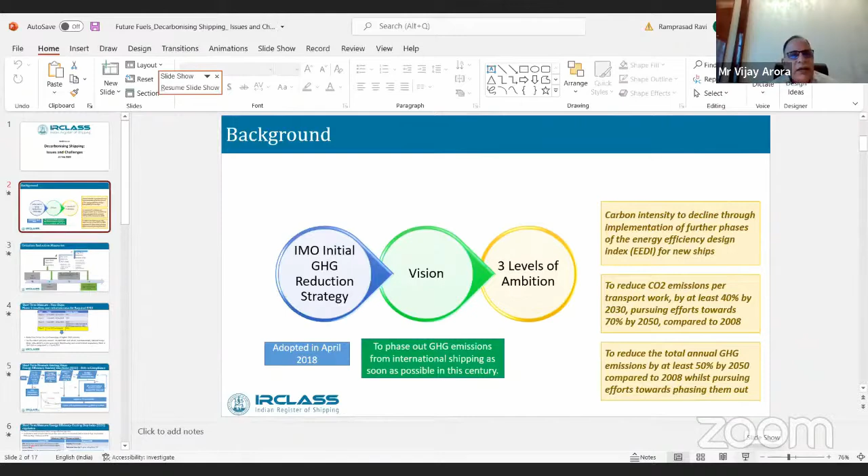So anything starts with a strategy, and if you look, IMO has been working on how the various emissions in the atmosphere have been controlled over a period of time. NOx emissions came, tier 1, tier 2 requirements came, then it came to desulfurization, and later on it came out with the IMO strategy on decarbonization, saying how we can further improve the GHG emissions. So this IMO strategy was adopted in April of 2018.

The vision was to phase out GHG emissions from international shipping as soon as possible in this century. And to achieve this, a combination of factors was taken into account: carbon intensity should improve by improving the EEDI, we should reduce the CO2 emissions by 40% by 2030 and 70% by 2050, and reduce the GHG emissions by 2050, all compared to 2008 levels. So the framework was put in place.

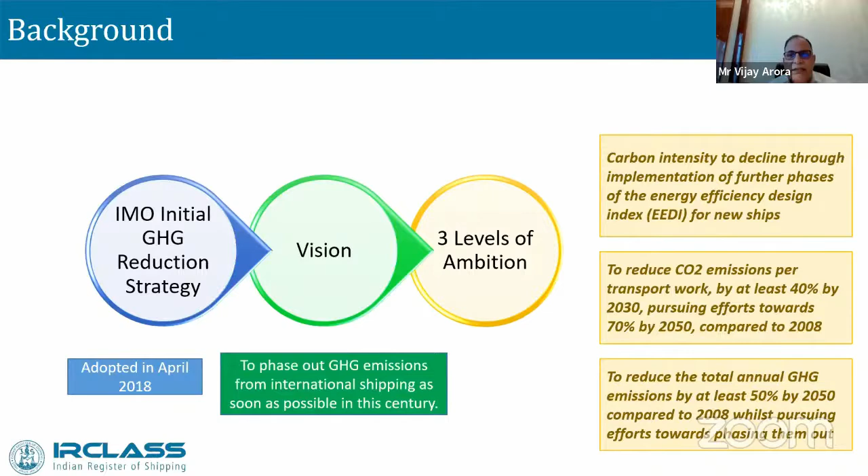So to achieve the vision, there were short-term, mid-term, and long-term measures adopted. Short-term measures were from 2018 to 2023, 2023 to 2030 are mid-term, and 2030 onwards will be long-term measures. We are currently in the short-term measures, and if you recall, in 2018, we came out with SEEMP Part 2, which talked about how the fuel consumption should be collected, and in 2019 we started collecting the fuel consumption.

And then in 2020, we talked about how, for new ships, the EEDI phase can be advanced, and that is how the new ships are helping us to see that the CO2 emissions can be reduced. At the same time, in 2023 EEXI and SEEMP Part 3 are coming out, where we'll be using the IMO fuel consumption data which is available with us, and the carbon intensity indicator will be used to see how both existing ships and new ships combined together are able to help us achieve the 40% reduction of CO2 emissions by 2030.

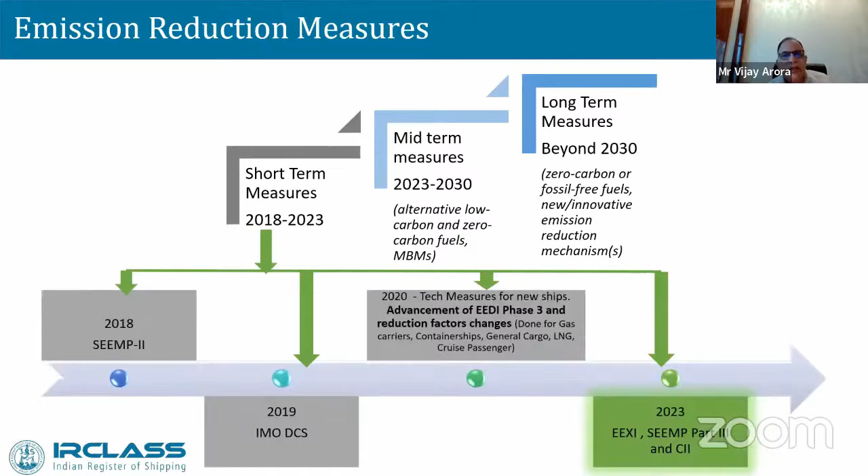So this is talking about the various phases of reductions which were applicable for EEDI, mostly for the new ships. The efforts have been on since 2013, in the direction of how we can reduce the CO2 emissions by designing ships in a manner that the fuel consumption is reduced.

And as stated in the IMO strategy in 2018, phase 3 has now been advanced, so that certain ship types of larger tonnage will be requested to start building ships in a manner that the CO2 emissions are reduced. And this advance of phase 3 will take place from April of 2022, where such ships, maybe gas carriers, container ships, will have further reduction factors of 30% applicable.

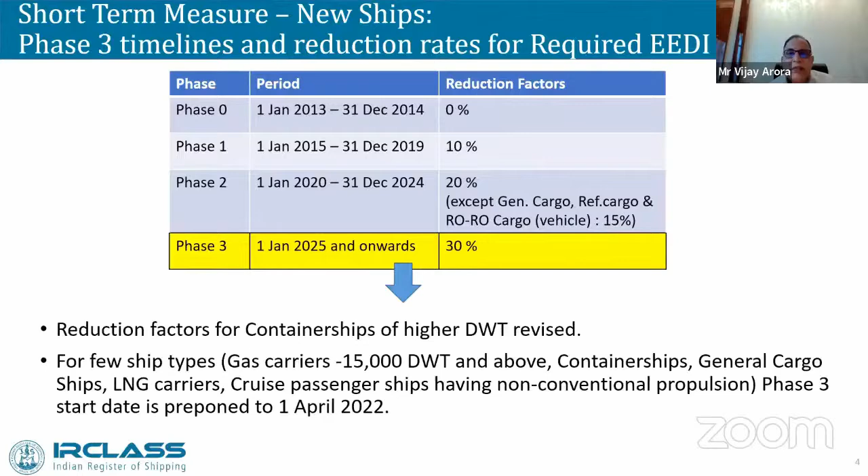As just stated, the combination of new ships and existing ships will continue for some time while we are using fossil fuels, and new ships are being designed with higher reduction factors. Even the existing ships need to catch up with the new ships.

And for that matter, IMO came out with the regulation which states that ships of 400 GT and above, and certain ship types mentioned in regulation 25, if their deadweight is greater than a certain threshold value, are subjected to this regulation, and that is how the attained EEXI will be calculated. The required EEXI will be calculated, and we'll be comparing that the attained EEXI is less than the required EEXI, so that the ships are issued the technical file and the International Energy Efficiency Certificate.

This will be mandatory from 1st January 2023, coming on any annual, intermediate or renewal survey falling due after this date. But the regulation will become effective from 1st November 2022. I would like to reinforce this issue: 1st November 2022, I think that date is a very important date.

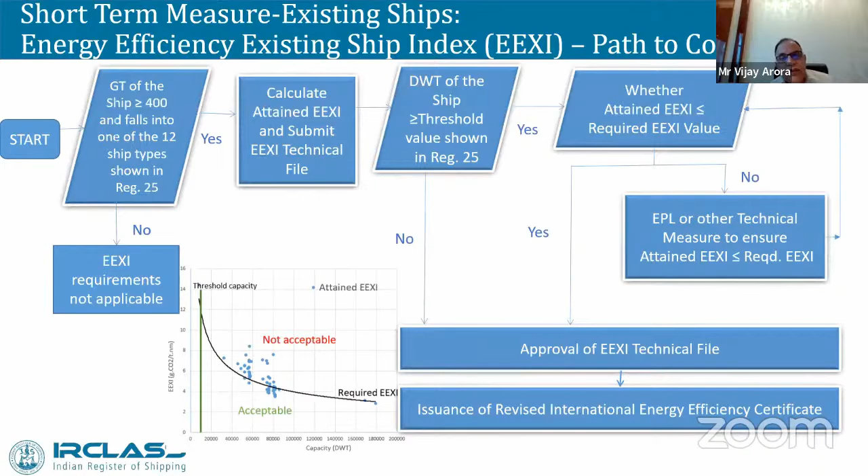By this date, the ship owner should ensure that this technical file, if it is possible, is placed on board. And if in case the PSC boards the vessel, you have a technical file available with you. And then the IEEC can be issued when the surveyor boards after the 1st January 2023 for whatever survey, first survey falling due. So we can go to the next slide.

I just remind you, your 5 minutes are almost up, sir. Okay, please continue. I may take 3-4 more minutes, sir, if you don't mind. Otherwise, I'll be faster, no problem. I'll be a little faster.

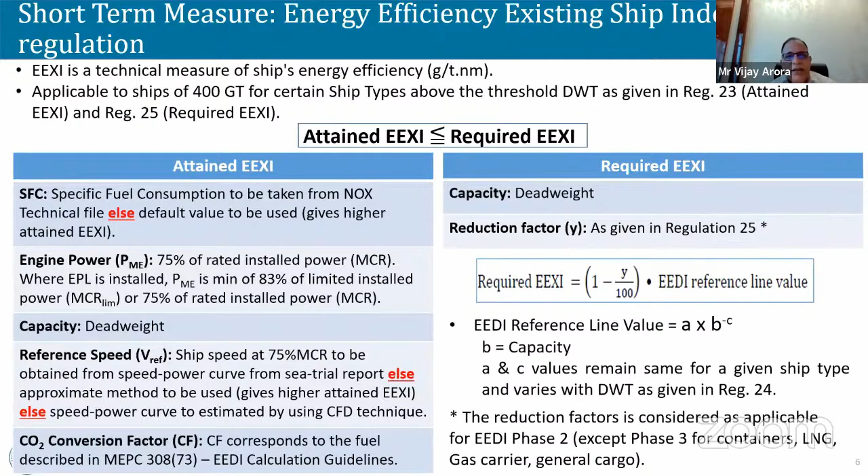So this is talking about attained and required EEXI, which I talked about. Here I have given information as to what documents and parameters are required for submission for calculation of attained and required EEXI. On the screen, specific fuel consumption is required, engine power is required, capacity and deadweight and reference speed is required, and conversion factor is required.

For calculation, the required EEXI has a formula which needs the reference line value and the reduction factors. Here, the important point is that the reduction factors for EEXI are compared to phase 2 of EEDI. That means existing ships have to match the EEDI of ships built with the phase 2 requirements, which is a very difficult task, but the owners have to do that. A little more difficult is that if ships are built before 2013 and don't have the sea trial report, then there are some issues.

But those issues can be resolved: either you can opt for the option that an approximate value can be used, or you can go for CFD analysis. The approximate value helps you, but it is not so encouraging for the ship owner because the attained EEXI goes on the higher side, by which the ship owner is affected. But if CFD techniques can be used to determine the V reference, which is not available, then the ship owner is at least not affected. We go to the next slide.

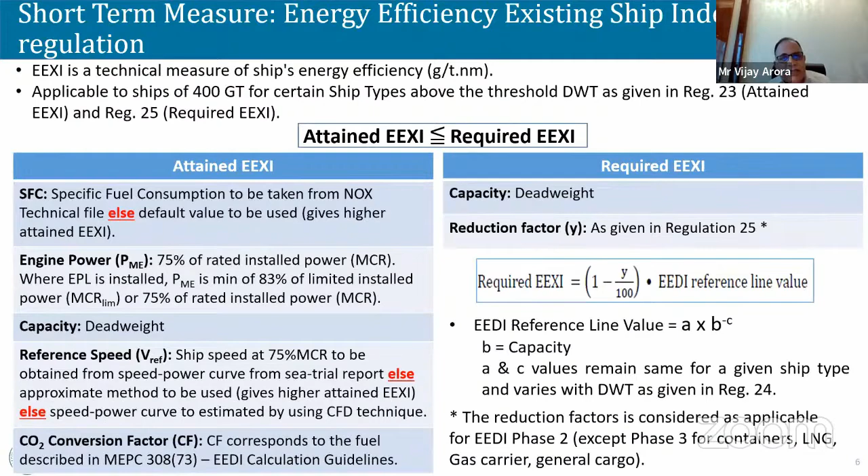Here again, I'd like to say something important: let us be very clear that if we are able to meet EEXI today, it is good, but you have to meet CII also for all the time you are going to operate these ships. So it is always better to improve your attained EEXI to a larger extent so that the design itself takes care of your operational efficiency, because the ships are old and cannot operate more efficiently than they do today.

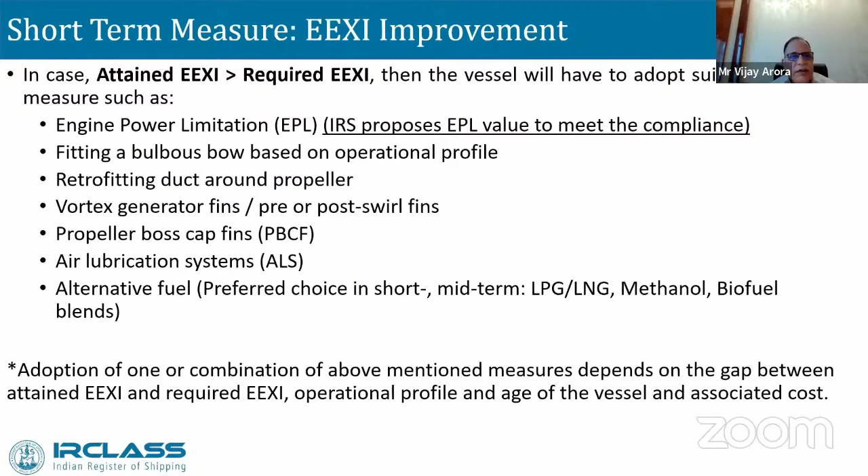You can control it to some extent, but if you can bring such energy saving devices fitted on your ships, you will be able to run these ships for a longer period, because this design efficiency will give you a factor in the CII part. We can go to the next slide.

So this is again for the use of the industry, the people who are going to sail on board, because when EPL is used, it is not that you cannot override it. You can override it in certain situations mentioned in the onboard manual. It could be adverse weather, a rescue operation or avoidance of pirates, and in those cases you need to record it in the onboard management manual, inform the administration and the RO that you did use it, and at the next port bring it back to normal.

And the records required to be maintained in the OMM manual are listed here, which can always be referred to in the onboard manual.

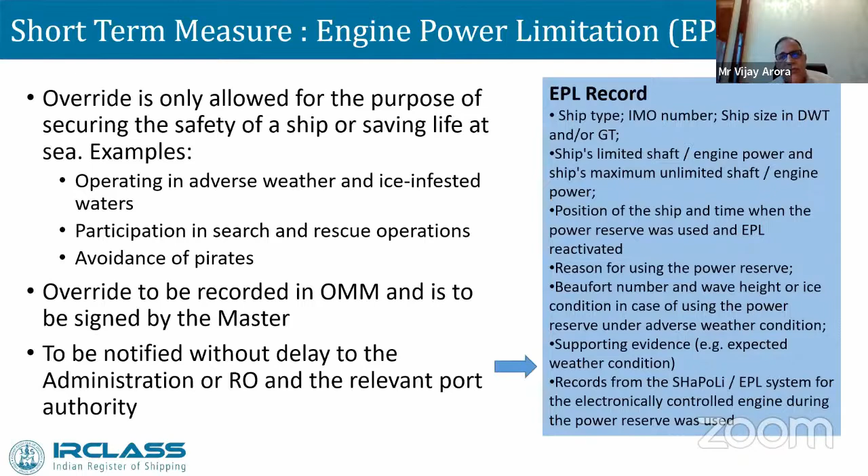So we can put the next slide.

This is the calculation we have done for the vessels where data is available with us. This example is only for tankers and bulk carriers. You can see the red dots are above the blue dots. The blue dots are the required EEXI for tankers and bulk carriers, and the red dots, being above, mean the attained EEXI is not meeting the requirement.

So most of the vessels today, almost 90% of the vessels which are at least with us, have a problem that they will not be able to meet this unless they adopt some measures. The range in which measures are required may range from 55 to 75%, which may lead to a reduction of speed from 15 to 5%.

So we can go to the next slide.

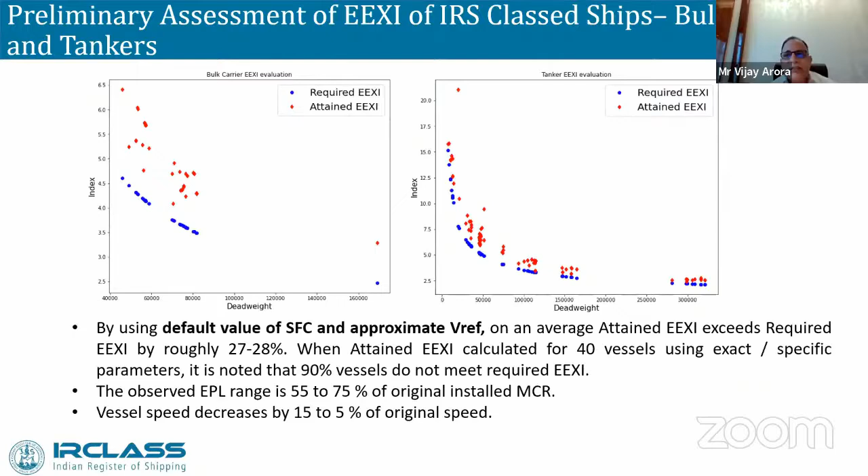This slide is an important slide. Here we are talking about the CII part and the new regulation, which is coming from the operational energy efficiency measure. In 2023, when this regulation comes into force, you already have to have a reduction of 5%, based on the 2019 fuel database, which people should have taken into account, but not many people must have. So there is something to be done on the operational efficiency measure so that you meet this. Otherwise...

It is quite possible, with the ratings given as A, B, C, D, E, that once you calculate, we have given an example for a certain ship where the required CII is, let's say, 10, and the attained CII comes to 9. She falls into B category. But then, as the period lapses, the same ship, because of no further improvement, may go to C, D, and E, and that becomes a discouraging factor for the ship owner.

This can be explained in the next slides.

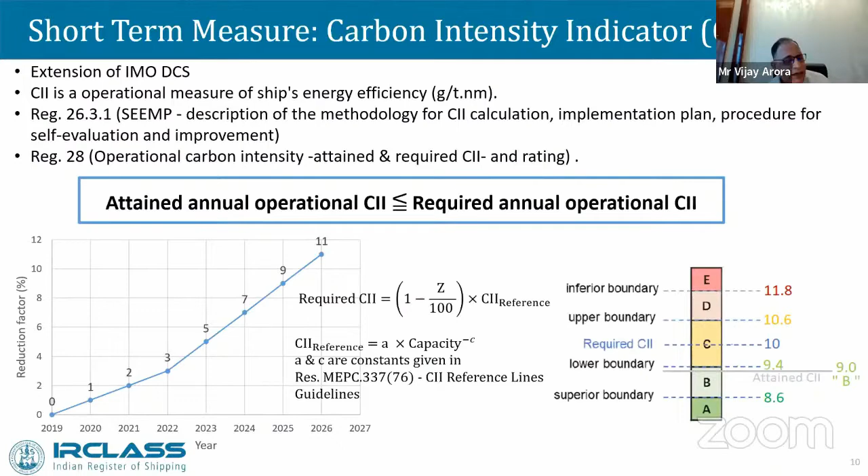So the next slide we have taken again from our database, which is available with us. We have taken the fuel consumption data of 2020, and tried to use the data to see what happens in 21, 22, and 23 if nothing is done. We can see that the ships are moving more towards D and E category. In 2023, the percentage falling into D and E category roughly comes around 54%, whereas in 2020, they were roughly around 44%.

So what is happening if nothing is being done? These ships which are in A, B, and C start going to D and E, which the IMO discourages, because they don't want a ship to have a continuous rating of D for more than 2 times, or to fall into E category. That becomes an issue which needs to be addressed by using energy saving devices.

We can go to the next slide, sir.

So these are the factors which are available. Basically, we can use improved operation. There was SEEMP part 1, but we never really used it; it was just kept on board. Not many ship owners or managers used it, but these are things which can be used. We have listed them here, and we can see how operational efficiency can be improved.

Here I have talked about something on biofuels and alternate fuels. I have not discussed the alternate fuels part in detail, but the industry is working on this. It requires a good approach from various industry people, governments, lending institutions, plant and engine manufacturers, and yards. They need to come together to look into the advantages and disadvantages of the various fuels which can be used, because it is not very clear. Though we know the properties, the infrastructure needs to develop, and storage capacities need to build up. While we know that the fuel which is seen to be viable is LNG, we have been using this fuel for a good amount of time.

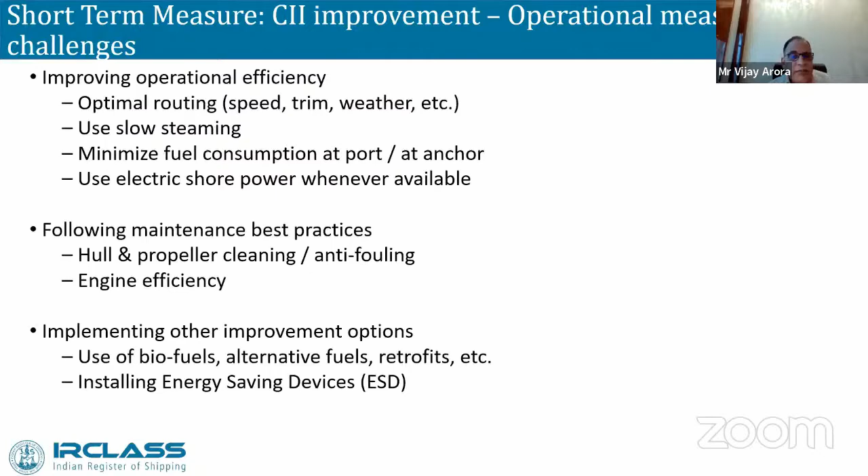So we can put the next slides. This is talking about SEEMP part 3, what all data is required, and what SEEMP part 3 will contain.

This will be listed based upon when the submissions are made. It's for information only that SEEMP Part 3 is required. The owners have to see that the implementation plan is aware, and they know how they will set the improvement into their own system so that the carbon intensity indicator is improved or retained, basically either in A, B, C category, but not go down to D or E category. And if they go from D to E, corrective action plans need to be prepared and approved by the administration or the RO. So let's go to the next slide.

As far as IRS is concerned, sir, we have made rules for these types of ships. Gas fuel vessels, LNG, LPG are available with us. We have made natural gas fuel guidelines for coastal vessels and inland vessels also. We have made guidelines on methanol fuel vessels and for fuel cell power vessel installations, high voltage shore connection system for ships, and for battery powered vessels.

Why are these guidelines there? We have put them into guidelines and not into rules, but as more and more experience is gained, we'll be adding to them to see how best we can incorporate them into rules. We can go to the next slide, sir.

This talks about what we have done till now, again with the help of the industry. We are thankful to the industry for helping us do something on this. We have been able to run two cement carriers using B20 biofuel, wherein we attained a reduction of CO2 by almost 7%, and there was no impact on NOx or SOx. That is also a good point.

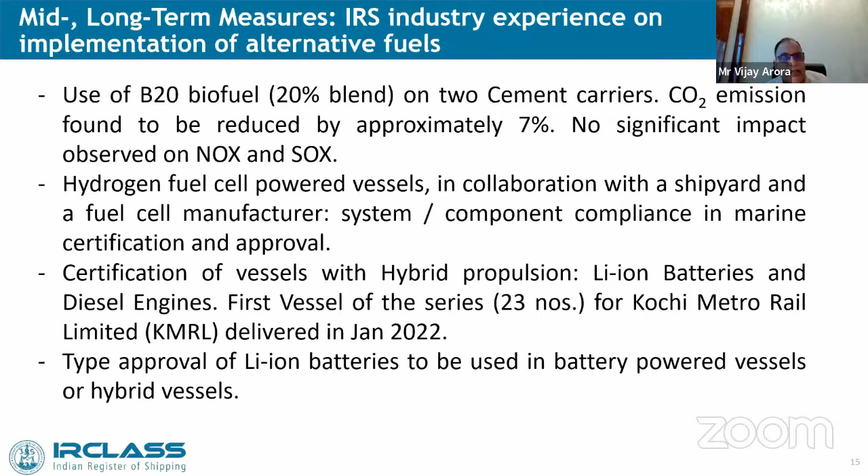We have prepared a web-based electronic tool which can help us do the EEXI calculation. It is simple - you feed the data, it is available. And if the attained EEXI is less than the required EEXI, the technical file is prepared and can be submitted straight away to IRS for approval. We can undertake these EEXI assessments and issue you the IEE certificate.

We can help you determine what energy saving devices can be fitted by using our CFD analysis. We have also prepared the CII tool, which can be used again for measurement of CII ratings. And finally, we can conduct various trainings and workshops like this to help the industry as best we can. We are geared up to help the industry in the initial phase of short-term measures, and we are always open to any requests the industry may have from us, sir.

Thank you, sir. Arora sir, if you can quickly touch on what Indian ship owners, or that 90%, should be doing.

We are talking about two things basically. First, the basic requirement for a ship owner to continue operating his existing ship is EEXI - that's the first point. CII will be coming later, but CII is also inbuilt into the EEXI, as I said.

So for the EEXI part, as I said, for those 40 vessels we calculated which are still not meeting the requirement as shown on the screen, the EPL will help them achieve reduction so that they can attain an EEXI value lesser than the required EEXI. The only thing is they need to ensure that whatever speed reduction takes place, in the range of 5 to 12%, or up to 15%, is acceptable to the charterers, and then they can have their attained EEXI meet the required EEXI.